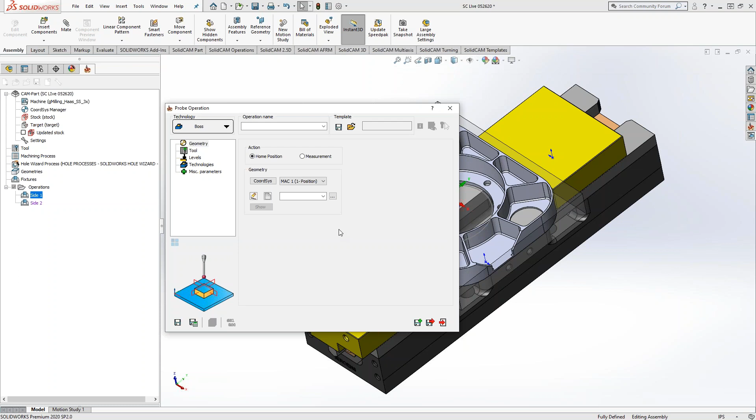Probing inside SolidCAM is pretty much what you would imagine it is. It's basically just a series of operations on the top here where you're looking for either your X, your Y, or your Z using multiple points or a single point, or like we're going to do today, just finding a boss. And if you look at it, the boss is asking us for the sides of a boss like that. And essentially, when you're doing probing, whichever one of these technologies you choose here, you actually are either finding the home position, which is what we're about to do, or measurements.

And between these two, all you're really doing is collecting the coordinates of where the probe is touching. And then according to your post, according to your probe module, it'll save that information in different locations. So if it's looking for home, it'll actually save it wherever your controller saves home position. So when you touch off on it, you can set up your G54, your P1, whatever it is.

With measurement, that's going to be a little more detailed to your request of the post team where that information goes. So when you do your measurement probe operation, it actually saves that X, Y, and Z coordinate and then places it wherever your particular controller, your particular software is looking to keep that stuff. So that's something you'll have to work with your post team on. But generally, the operation works the exact same way.

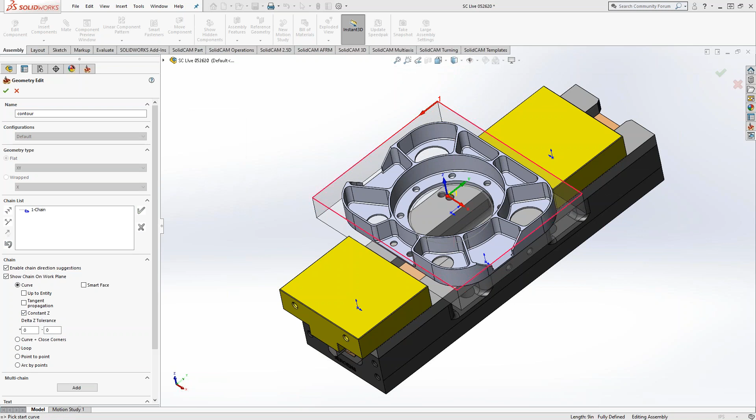So you choose your technology in the top left corner. In this case, we're doing a boss. And since we're looking for a boss, we have to choose geometry that is related to that. And that's basically just going to be the outside edges of, in this case, our stock. So I'll just grab one of these edges here, turn on my constant Z, and I've got my outside edge of my stock. So I'm basically outlining the outside edge of the boss.

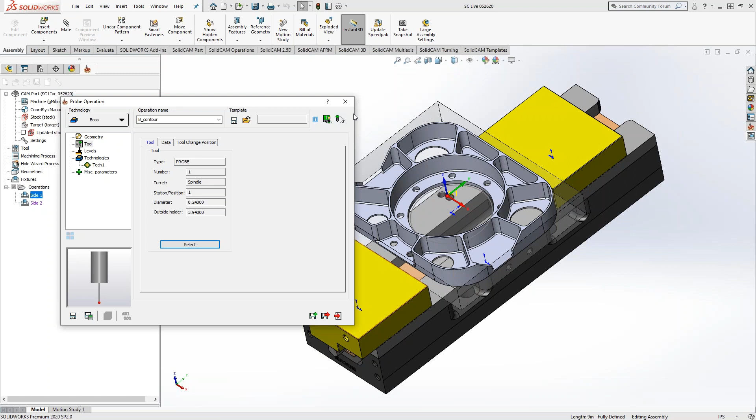If we go to Tool, the interface is the same, but once we get to Select, we really only have the ability to add a probe. So it doesn't even give us a shape to choose from. It just asks us to choose the probe, and then we just give it our probe dimensions. I'm just going to go with the default one for now. And if you want, you can always take a look at it to see if it looks correct, if your dimensions are correct, even if it has enough of a reach. But really, all you're doing is just defining the probe for your probing operation.

And then in data, you can put in your feed rate. Under levels, very similar to what you see with other toolpaths that are not based off of depth or anything like that, all you're really defining in your levels is the clearance level, where this thing's going to retract to as it moves around. There really isn't an upper level, lower level for a probe. That's basically the point of the probe. It's looking for those things. So we're really just setting up the clearance level.

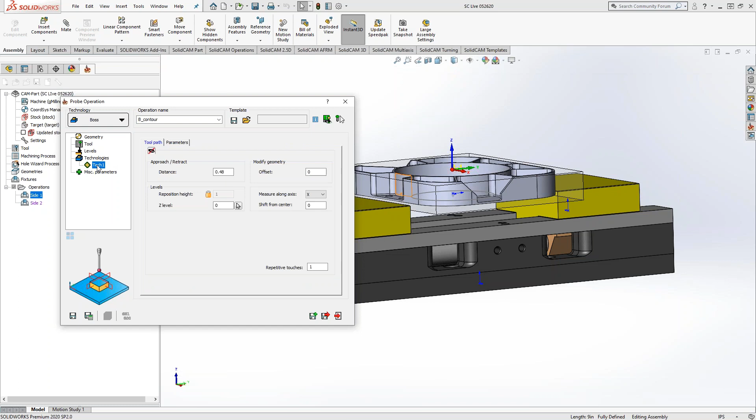It's in technologies that you'll find the specifics of the toolpath, very similar to all our toolpaths. The technology section is where you're going to find the specifics. Here, you actually have it labeled as technologies, and it's calling out Tech 1. Tech 1 is just the default name for whatever this inset is over here, and this is the specifics of this toolpath. In this case, we're doing boss. So the Tech 1 is how we're going to do that boss.

Let me just get a good angle on our part here. So approach / retract, that's going to be our distance there away from the part. We've got our levels here, so I can tell it where I'd actually like it to measure the Z in terms of levels. And then my reposition height is that 1 inch that we saw over there.

Offset is offset from the actual geometry that I selected. I might be choosing any geometry I have on screen. You always work with what you have on screen, but this offset will let me offset from that. So maybe I don't have a 3D model that represents my stock, but I know how much from the walls of my target I'd like to measure. If I choose the outside edges of my target and put an offset here that represents the stock thickness, I can still use the outside of the target as my geometry, and here I can put an offset to account for that. So you always use the geometry you have in front of you, or if you don't have any, you can sketch something, and even then we can do an offset off that if it makes sense. There's always a way to modify your geometry.

It's this last section here that we're actually going to tell it what we want to measure. Since we have a boss selection in the top left corner, I can choose X, Y, or X and Y. You can see X and Y are going to choose those distances. And if I want to do multiple touches, repetitive touches to get additional data, we can find the median between them to get that number.

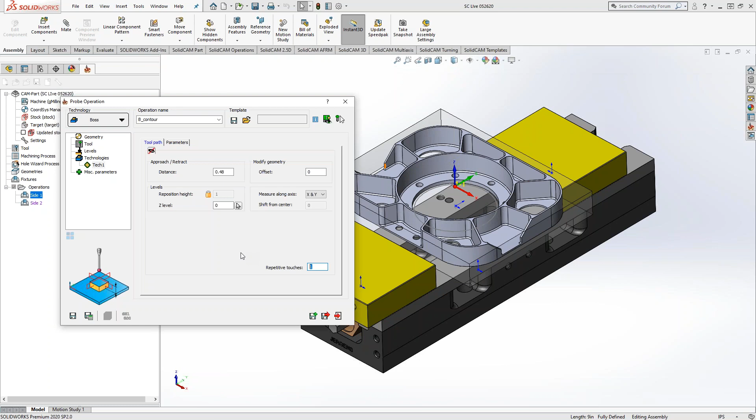All of this is to set up the actual toolpath. What's unique to the probing, though, is this eyeball up here. If I click on the eyeball, I can actually see what it is I'm telling it to do. It's kind of like having a host CAD of a machining toolpath, but live in front of you.

You can actually toggle things, like for instance my Z level. It's right at Z equals 0. This is the Z equals 0 of my Mac 1 position 1. But since I have this set up for home position, I'm almost relying on—Kevin, would you say this is relying on a previously established Z? Actually, now that I think about it, where's this Z coming from? How does it know that Z equals 0 is this top face? Z0 is the top of your coordinate system. So if you take that scroll wheel and go up or down, you'll see the movement go up or down. Well, what I mean is, how does it know that's Z equals 0?

Based off the coordinate system. Based off the coordinate system, but this is setting up that home position. So how does it already know the coordinate system?

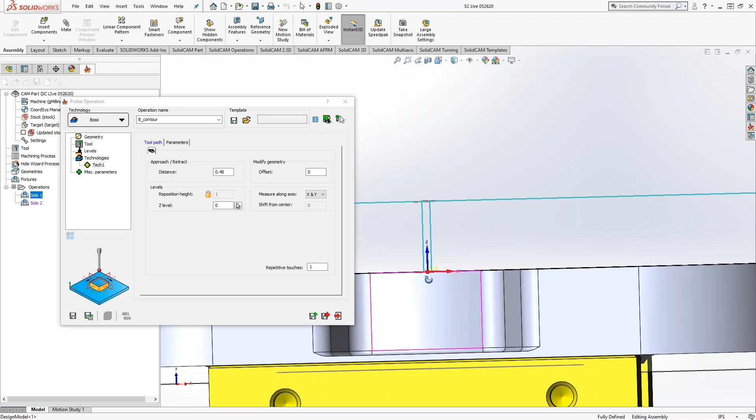Exactly. So it's like Kevin was talking about yesterday. You're going to plug in, locate your stock—it might be saw cut, whatnot—and you have a general idea of where to start from. This probing will get the specific accuracy numbers, so it'll actually locate it specifically on your part, giving you a little more accuracy there. But like Kevin said, you start from a rough position. You're probably off, but not by a lot, because you can eyeball it within—I know when I worked with this guy in the shop, he would eyeball things within like 10 thou, tenths of a thou or something. He was pretty accurate with his eyeballs, but a lot of times you'll get the rough idea of where this is, and then when you put in the safety distances and offsets, the probe will come within a certain distance, and as soon as it starts to approach, it gets that accurate distance.

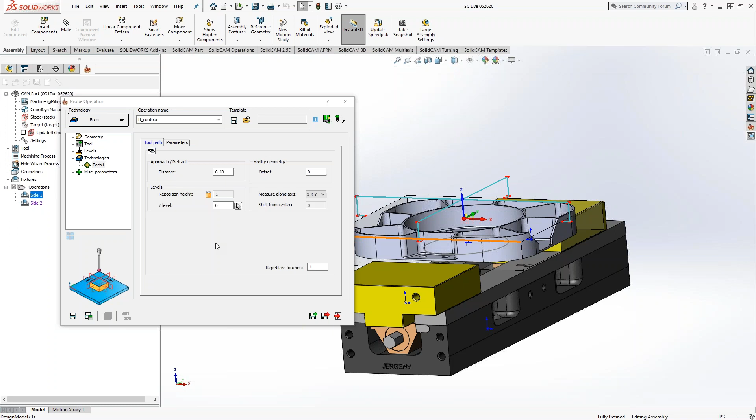So this Z equals 0 is roughly what you've eyeballed at the top of the part. You have an idea as to where this might actually begin, and then this probing will get it within the accuracy of the probe, tens of thousandths, or maybe 10 thou, but basically it's like Kevin said. So this Z equals 0 represents the top of the part as you've eyeballed it.

And then what you can do is, let's say we lower it. So I'm going to click on this icon here and maybe choose to go down to here. That records that Z coordinate from our little eyeballed Z. And now you can see the probe is actually going to go down to that point and then come in and record the X and the Y coordinates at that point.

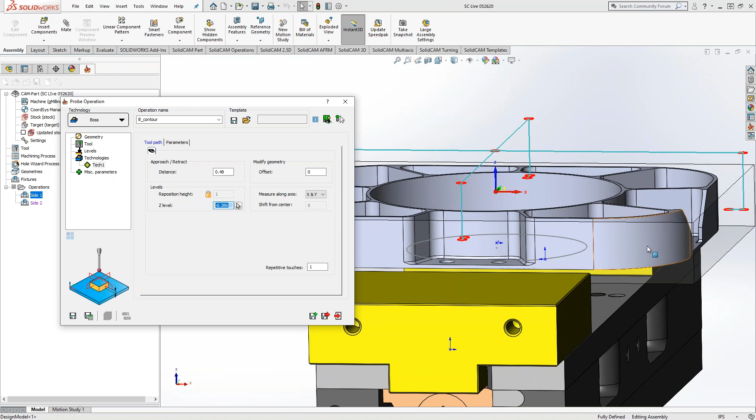So this is still a lot of eyeballing, but again, you've got a rough idea that if you go down a little bit more than 300 thou, you're going to touch a face there. If it's saw cut, you know probably where you want to kind of touch it, so you get a middle ground of where a good Z location is, and then you'll be able to record your X and your Y from your part.

Another feature they added in there is if Mark clicks where it's negative 386, you guys can actually use your center mouse wheel and roll that up or down as well. Let's get a side view of that. You can see that most times when you have this sort of prompt, you can do that sort of thing there, so you can be incremental about it. So not only can you eyeball it by clicking on the geometry, you can eyeball it here as well.

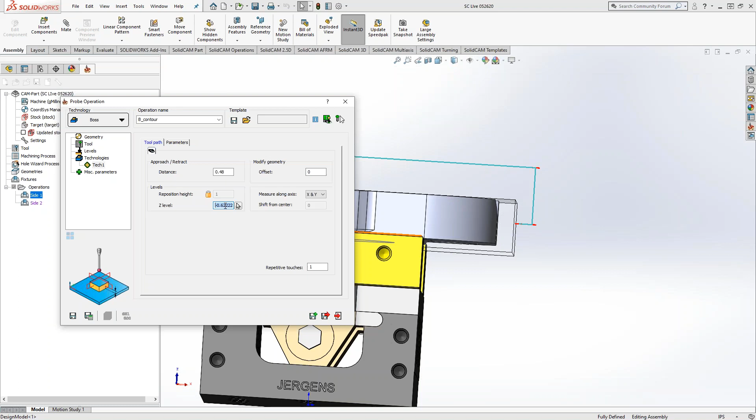And if we take a look at that, what that's going to do is find the center of X and Y and give us the XY coordinate for the center of the part.

And under parameters, I think, not much there. Basically all you guys have to eyeball is get it within a half inch, is what we're looking for. Yeah.

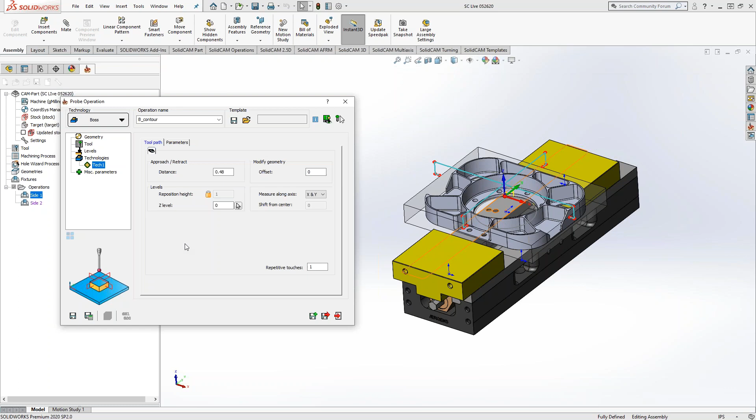Probably a good safety distance, so you're not waiting forever for this thing to approach the part when it's not really doing it. No, negative 0.4. Okay, so that should be a good distance.

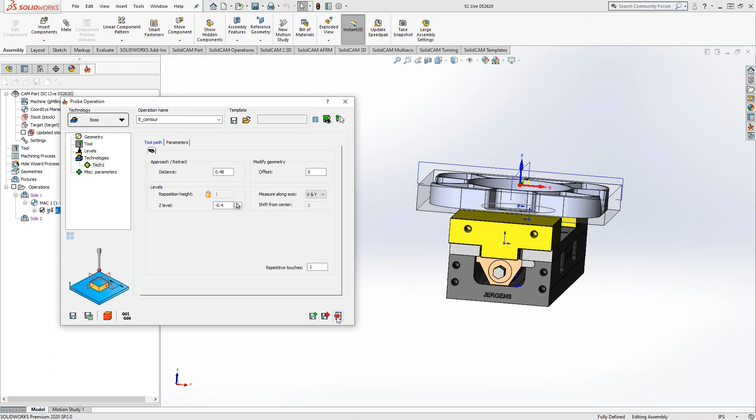We can click save and calculate. Stock is absent from the submachine. Okay, that's different. You don't have a submachine. I don't. Okay, I don't know what that's all about, but it calculated it.

So if we were to see that, it would actually probe and then give us our X and our Y. And now if we wanted to find or get a more accurate reading for our Z, we can add a probing operation. We can do single point Z, or we can do angled Z. Angled Z, basically, I believe, is taking multiple points to kind of just give us a level playing field kind of thing. Correct, like multiple points, yeah.

So let's do measurement. Let's do a Z point. I'll click new. And it's asking for a chain. So let's grab, I guess that. Actually, it only looks for a line. Okay, yeah, so let's do that.

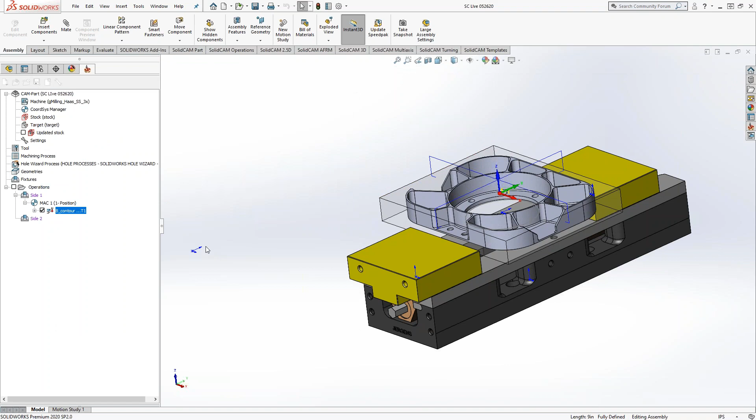Let's grab single line. This depends on how accurate you guys want to be. Usually, when we're just finding the Z point on something like this, we could just do a single point. Doing the Z angle is, for those of you guys that have been around CMMs, kind of like scanning the top surface almost. So it will take multiple hits on that top surface, and flatten that angle out if that part was tipped up at a certain angle.

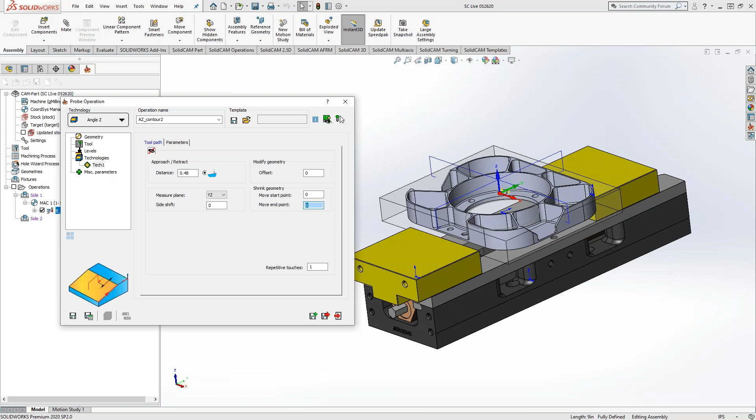Okay, so we have our approximate half inch approach, offset's okay. That one there, that one there. So let's get a good view of that. So I've defined it as that line that I'm going to try and get the angle. That is in the YZ plane versus the XZ plane.

Side shift, let's move in a little bit. I don't know what the size of my probe is, but let's say we move in by, say, 100 thou. Go minus. Minus 100 thou.

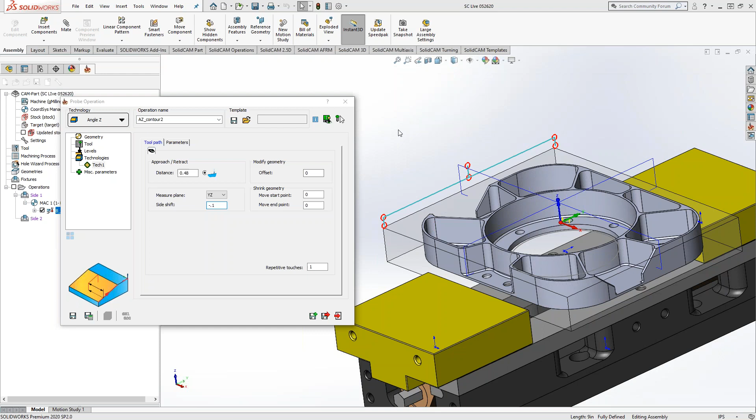Let's do it more so we can actually see it. So you can see that the side shift refers to the line that I chose. I just moved in that much there. And then from the edges of that line, I don't really want to be right on the edge, so we have these shrink geometries. I can bring it in by, let's say, a quarter inch as well.

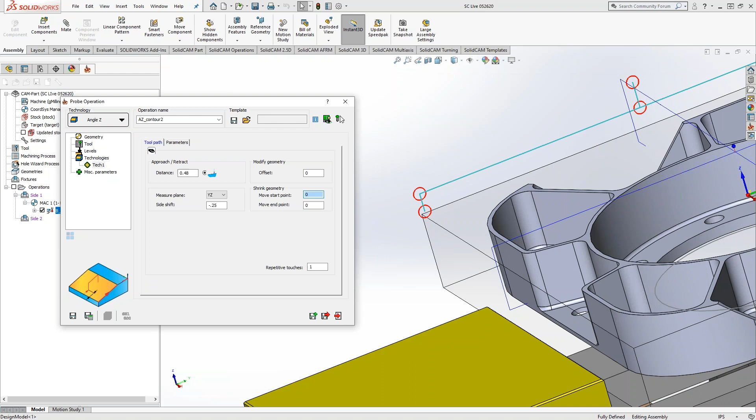Come on, minus 0.25. I don't know what's wrong with my keypad today. Okay, my num lock is on, that's why. Wow, what's going on with this thing? Okay, we'll do 0.25. I'm just going to use the wheel. Oh, there you go. So for whatever reason my keypad doesn't want to work, so I'm just going to use the wheel. And oh, that's why - I guess it's shrinking, so it doesn't take a negative number. That's my mistake, I should have just put in a positive number. So I just put in 0.25.

A lot of the times inside SolidCAM, the wording will tell you what it is. In this case, I was trying to go negative because I wanted to trim it, but there really is no need to extend it. So shrink should have been the indication there that I want to shrink it, or trim it, by that 0.250. So we brought it in by 0.250 on all sides.

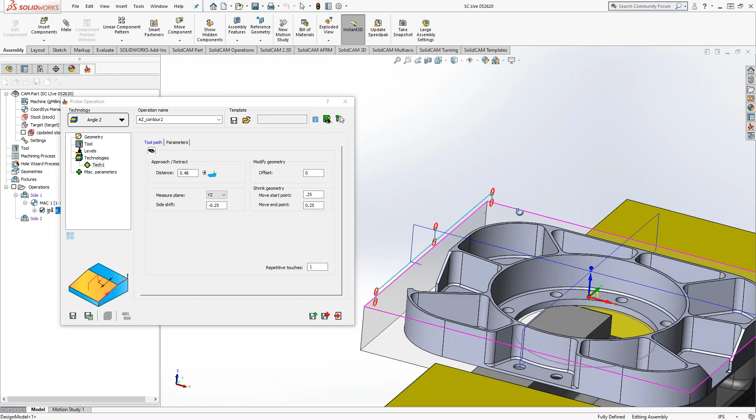And let's see, what else? We've got repetitive touches, there's really nothing else there. If I do a save and calculate on that, that will measure my Z, which gives me an idea of between those two points what the Z is. Parameters, nothing there, nothing there.

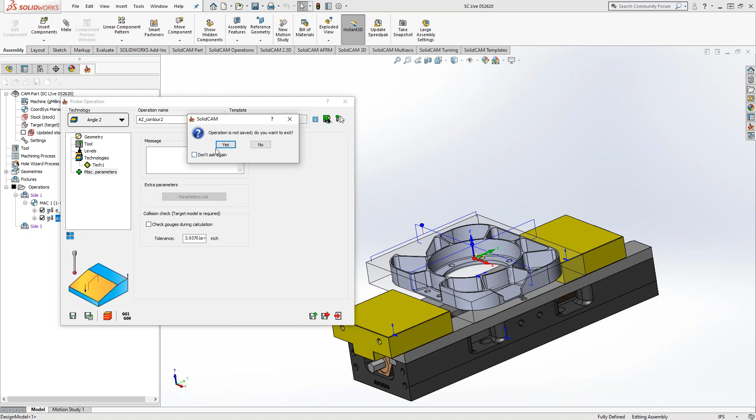But it's like Kevin said, a lot of the times if you're just trying to get the Z, you can use the single point Z, and that's just going to give you that one point of contact and record the Z coordinate. But between these two, I now have my X, Y, and my Z for this part.

And if you do your probing operation the same way every single time, you can also make this a template. We've talked about templates before. So you can make a process template out of that. It records your probe size, your feed rates for your probe, and then the procedures you took - in this case, the boss for the X and the Y, and then my angled Z for my Z. And then I can just keep importing that probe every time I want to do it.

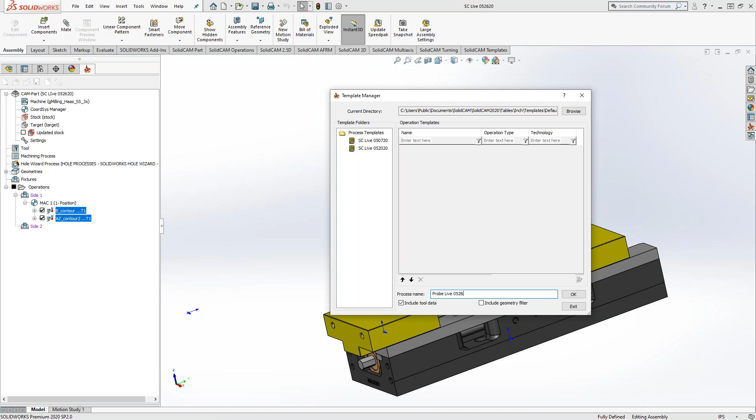So for instance, let's make a probe here and call this one probe live, with today's date - today is the 26th. That way, when I go to do it on the bottom side, I can say add operations from process template. There's my probe live, click OK. We're doing this under Mac 2. Click OK, and now I have the probing operations for eventually when we go to do side 2. So anytime you find you're repeating an operation, irrespective of the geometry, you can always load a process template, and then it loads the tools, loads the operations, and then you just have to reselect the geometry.

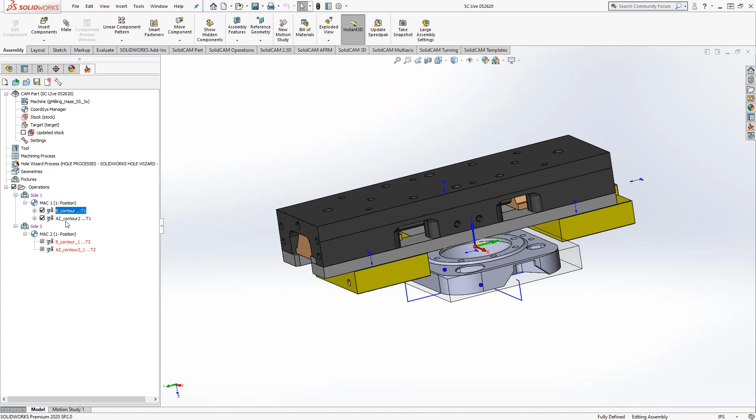Let's go back to our Mac 1. Now that we've probed it, let's hide that geometry there. So it's been probed, we've located it, now we can machine it. So what's the first thing we want to do to this, Kevin? We want to do 3D iMachining?

Yep, let's do 3D iMachining. Perfect. So we have a 3D model representing our stock, but if you use the box definition or any other definition, let's say the offset one or anything like that, 3D iMachining is perfect as long as you have your stock and your target defined. So if you have the 3D package, that's the toolpath I would say.

Sounds like Kevin is also suggesting they use 3D iMachining. But if you don't have 3D iMachining, you can do something very similar with HSR. You can do it with 3D milling if you have it. And if you don't have any of those and you just have the 2.5D package, then what you're basically doing is choosing a series of pocketing and profiling toolpaths to do something very similar.

So we'll start with the 3D tool. Let's be real here - if you guys don't have 3D iMachining, buy it, it's worth it. Yeah, and this is when Kevin puts his email in the chat section so you can talk to him, and then he gets the sale. Yeah, right.

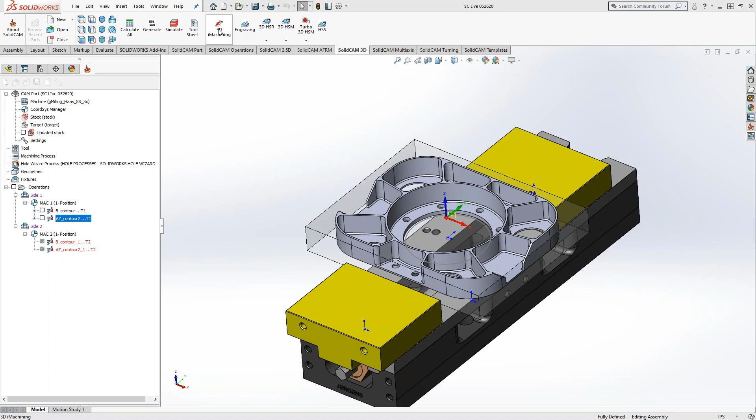Okay, so add milling operation, 3D iMachining, or we can go up here and say, let's go up to 3D iMachining - does the same thing. Just keep in mind though that when you click up here, it adds it to the end of the list, whereas I usually like to right click on where I want it to be. In this case, I want it right after this toolpath here. I'll right click, add milling operation, and it inserts it immediately after. But basically you're still adding the same toolpath, it's just where it gets added is the difference. So let's go 3D iMachining.

Okay. By default, it's looking at the target, which is exactly what I want it to do. And then working area, in this case, we're going to do the entire part, so I don't need a working area. But if there was something about this part, maybe it's a really large part, or maybe I'm only really looking for 3D iMachining to act in a certain area, I can use a working area to limit the travel of the tool to a certain area that I define using a chain. But we don't really need a working area, so I'm not going to use that.

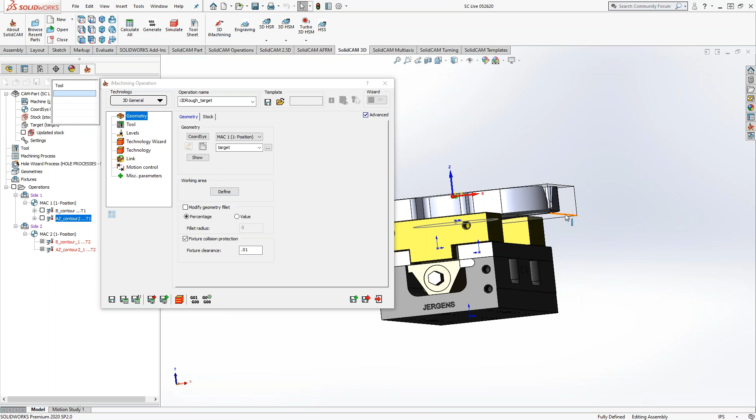Fixture collision protection, we have a fixture defined. I'm going to take advantage of that, and I'm going to say, whatever I do with this toolpath, I want the tool to stay within 10 thou of that fixture. That means that when I set up my levels, I can say the top of the stock and the bottom of the stock, and that tool should come as close to the fixture as possible while still milling all the way down to the bottom of the stock there. So I can take full advantage of the full envelope of work I have here without having to worry about colliding with my stock or with my fixture. And tool. Mark is grabbing tools here.

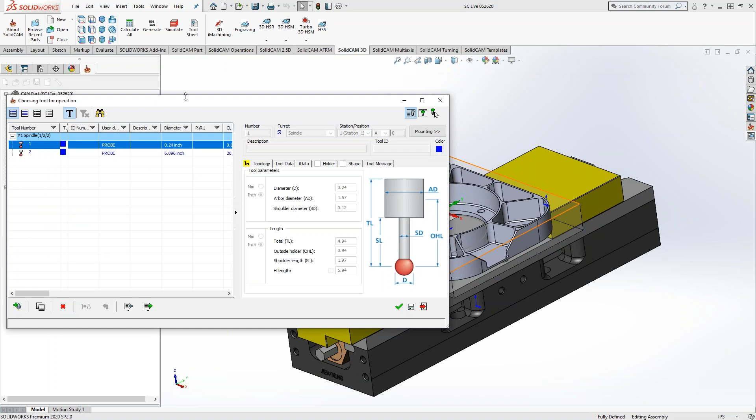Does anybody have any questions with the probing at all? Like I said, Mark went through it at a good speed here, but if you guys do have questions, definitely let us know so we can address those right away for you. Absolutely. And if you don't have the Probe module, you can always contact Kevin.

Yeah. But the probing is very similar to our regular milling toolpaths. So it should be the same thing. Choose your geometry, choose your tool, choose how you'd like to approach the part. But overall, it's still just the same idea. You're just doing some sort of movement of a tool towards your part, choosing geometry, choosing feed rates.

Yep. Here, I'm going to skip ahead of tool definition because I think we've done that a lot. And I'm just going to go right to my global libraries. And I think we made this thing out of aluminum. So I'm going to go to the master tool list for aluminum. I'm going to grab all the tools I think I want to use for this part.

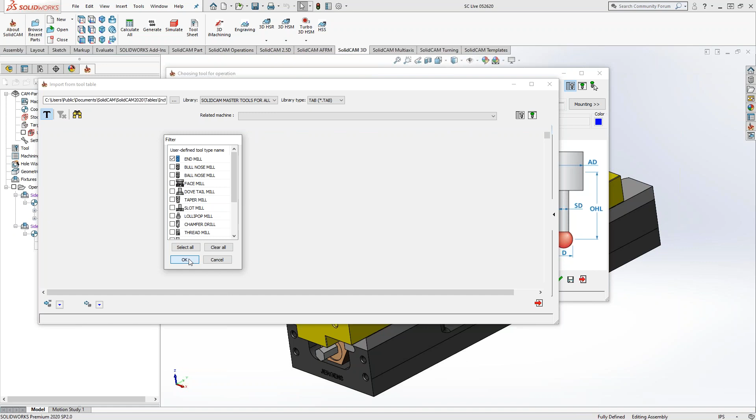And while that's loading there, the probing can do everything that a CMM can do. The only thing it can't do is any of the GD&T stuff. So if you guys are looking for a flatness call out, as well as true position, or like true position with maximum material conditions, stuff like that, it will not do. But it will do all the measurements, measure bores, angles, tapers, all that stuff for you. Like I said, it just will not do any of the GD&T functionality for you.

That's a good point. So what I've done is I've added a filter. So I'm only looking at flat end mills. And now I'll just do a filter to up to 1 inch. And I'm only going to go probably down as far as 0.25. So that filters the list to only show me flat end mills between 1/4 inch and 1 inch. And now I'll just click on the ones that I want. So I want that 1 inch, probably want this 1/2 inch. And then let's go down to 1/4 inch, and I'll grab probably this one. So with those 3 highlighted, I'll click on the white arrow to import only the ones that I've selected.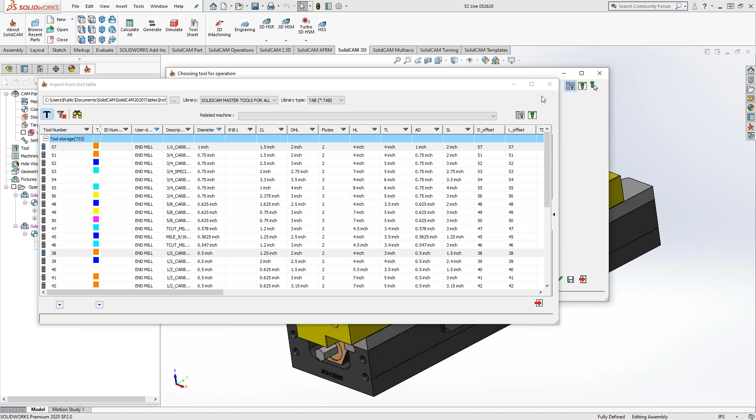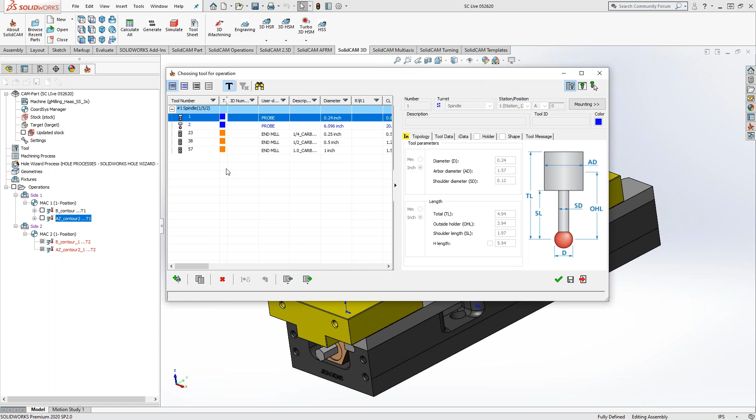SolidCAM blinks a little bit, and then it adds it to my active tool library. So there we are. We'll start with the 1 inch tool. So click the green check mark. And there it is. I'll add the second tool. So I'm just going to be stepping down the tool, taking advantage of the internal rest milling operation that happens when you do 3D iMachining. So the second tool is the 1/2 inch. And then the third tool will be my 1/4 inch. That one right there, green check mark.

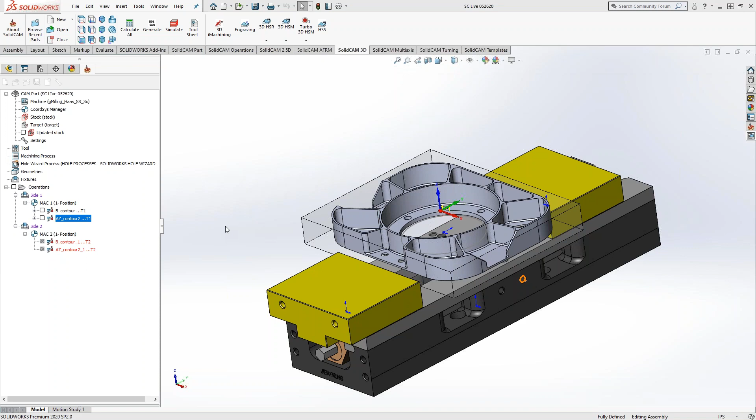Okay, so let's define parameters for the first tool. So if I go to this little mini window here, I'll click on this first one. We can see under my tool data, do I have a holder defined? Let's see. Should be. From the master tool list, usually it does have the holder, so I'm just going to double check. So tool picture. No, so let's add a holder. Not that it's entirely necessary for this one, because this probably has enough reach, but we'll just go with one of the default holders. Let's go to the other tools.

This one does not have a holder either, so we'll go, this one is the 1/2 inch.

Man, whoever made this library should have had this set up better. Yeah.

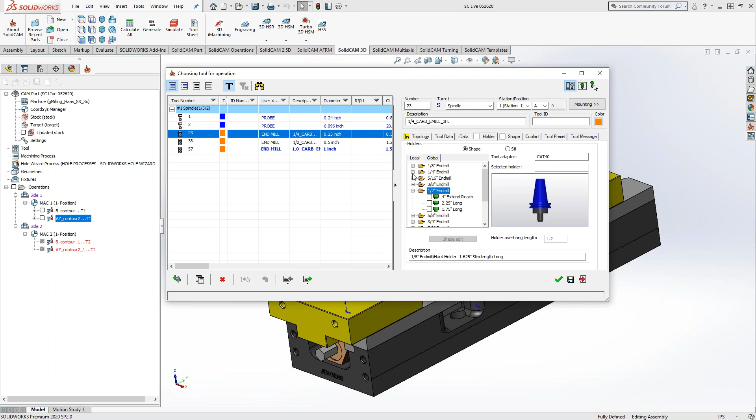For those who don't know, the master tool lists for both aluminum and mild steel were created by the US-based team, specifically headed by our buddy Kevin. And actually, this is the tool library that was at my old job that I used. So these were the tools that we had in our shop, and now it goes from being this huge task that was created only by Kevin. Now it's just, oh, I just stole it from my old job. Yeah. It was a huge task when I started it at my old job.

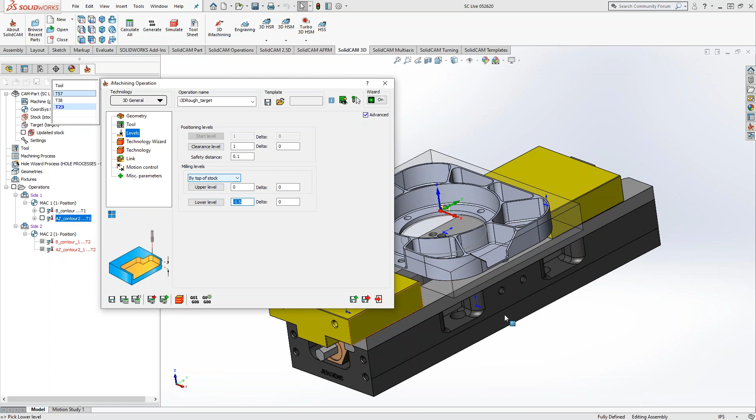Okay, so go back to the little window here, choosing tool 57, that's my 1 inch tool. Now I can say holder collision protection. Let's keep it within, again, that 10 thou. We'll be really close quarters here. Again, for tool 57, we're gonna do levels. I'm gonna say top of stock. And then for the lower level, we'll do the bottom of the stock as well. So we're gonna go right down to the bottom, maybe even going a little further just in case there is anything that I'm not seeing there, but pretty much when you define it by the stock, it's going to eliminate all that stock.

Technology Wizard, let's wow everybody by making this level 8 turbo. And then those parameters are based off of that. Technology, this is 3D iMachining. So not only do I have a wall offset and a floor offset, which I'm going to set to 20 thou just so we're not here forever calculating, we also have a scallop height.

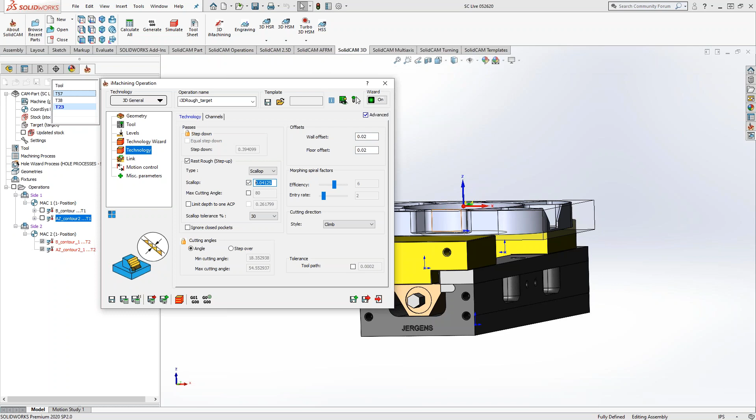Now, normally when you're working with a prismatic part like this one, with just prismatic pockets, the scallop height's not really going to come into play because there's no tapered surfaces or curvature. Really, the only place that this is going to affect is right here, these tapered faces, which I still care about. So I'm going to make these 20 thou as well. My recommendation is usually to make these 3 numbers the same. That way, after your 3D iMachining toolpaths, every surface has the same amount of material.

So that way, when you go and do your finishing, you don't have to do different scaling of finishing surfaces or anything like that. You can pretty much just use HSM on the whole thing, or you know how much material you left behind on all the faces. You don't have to think about it again. Sometimes it could be extra moves on the 3D iMachining. Sometimes it's extra calculation. But in my opinion, once this is done, you don't have to worry about it again.

So the only time that this becomes a little bit of a consideration is maybe when there are certain bosses that you don't want to machine to the same offset as the walls. Maybe that boss becomes a thin wall, or maybe becomes like a little needle, and you don't want that to be too weak that it breaks. In that case, you can always use sketching or working areas to kind of limit the travel of the tool so it doesn't machine as much material around those, so you avoid thin wall or needle kind of situations. At least that's my opinion.

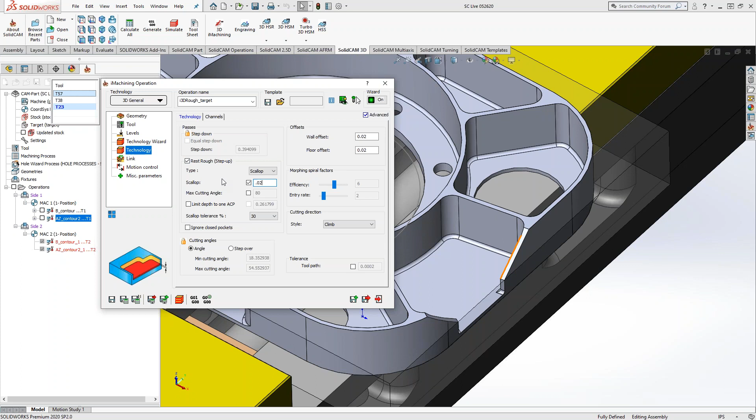Now, let's take a look at the overall part. Before we get too much farther, let's go ahead and show them where they would change it over if there was no surfacing at all. Oh, so top left corner, 3D General refers to the fact that this is the full three-dimensional version of 3D iMachining. It's going to look at tapers and curvature and all that. But if you wanted to do this only as prismatic, only profiles with some depth to it, you change this to 3D Prismatic, and basically what it'll do is it'll eliminate that scallop. So it looks at this only as just pockets, just the prismatic features that it has to machine.

Go to 3D, okay. So in the link section, very similar to 2D iMachining, 3D iMachining is also going to do a helical entry. But what this toolpath will do is recognize that we have some outside stock, we can do some side entry, and in these cavities, it'll do the helical entry. Very similar to 2D iMachining as well. iMachining in general will look for the side entry versus the helical entry. Those are the two types that you get with 2D iMachining and 3D iMachining.

So in our case, we're going to see a combination of all that. From the outside, it's probably going to do some side entry, get rid of the outside material. Maybe this pocket here, since it has that open edge, it'll do a side entry. But then for these cavities, it will do the helical entry to enter into the part and then spiral outwards.

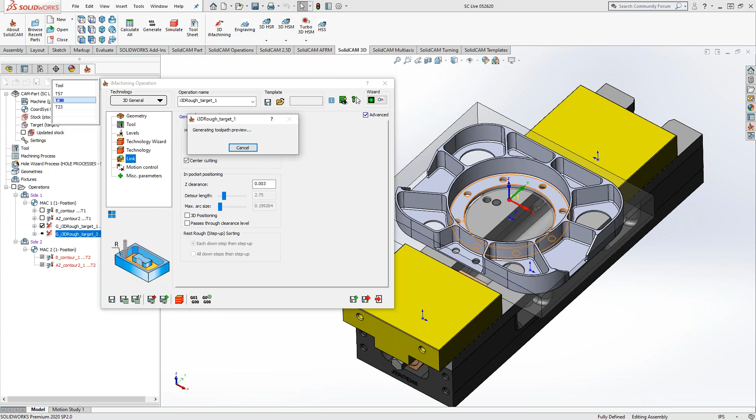Let's see, there is a question coming in. Does the probing give you X, Y, and Z so you can calculate? Yeah, so Scott's asking when you use the probing, instead of using it for the home positioning, using it as a measurement, you can calculate out the GD&T for that, but you just have to do that math for it.

But it will give you every point that you click on or that you tell it to hit, and then it will produce that data. It depends on the machine that you're running on, but like on a Haas, it'll be on your macro page for your probe macros, and you'll see all that data in there. And then you can capture that data and send it out to the customer if they're looking for that, or just keep it for your own. So great question, Scott.

And we also have it set up, Greg Shields has been doing a fantastic job writing these probe post-processors. So let's say you're going off of a casting, and castings are never the same, and you set it up to probe every part. It can do that, and it will automatically change up your G54 to kind of self-align everything, as well as, let's say, when we go to bore out that center hole, we have a really tight tolerance in there.